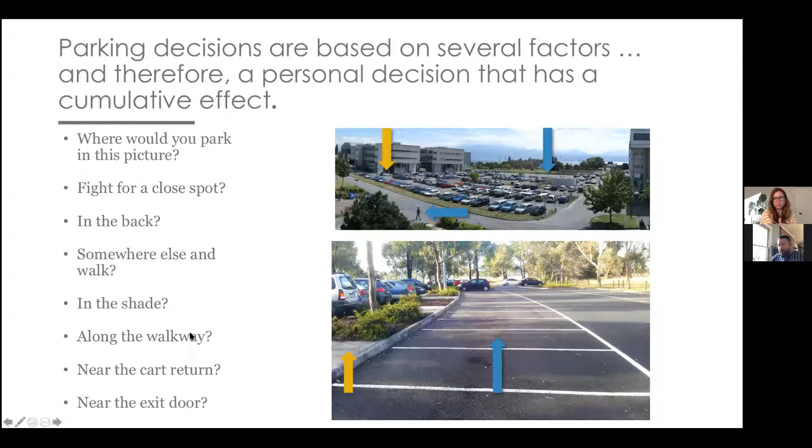And they all want the exact space they want. So they come to parking regulations thinking about where they want to park, but we have to take a step back and look at it from a bigger picture, and talk about how parking is being served.

We talk a little here about the history of parking in this country. We started out in the late 20s, early 30s, when very few people owned a car, but in the 30s we passed our first zoning ordinance. In the 50s, the Board of Adjustment had the authority to allow uses without parking, but eventually we took that ability away. In the 60s, the American Planning Association started recommending more and more parking, and I'll go into that process in a few minutes.

By the late 60s, about 83% of Lexingtonians owned a car, and we adopted parking standards that reflected everyone's willingness and desire, when land was cheap and available, for everyone to have abundant parking wherever they went. This was done nationally, so it's not like Lexington stands out as uniquely car-centric in any way.

Over time, because of the effect of all these parking spaces, we started amending the regulations again and again. We started in the 70s making changes, all the way up to as recently as 2020, trying to protect residents from the negative effects of automobiles. But what we were really regulating was giving relief to parking numbers, the number of spaces. That's primarily what all these changes relate to: how many parking spaces do we require, how do we provide regulatory relief so people can park the cars they need, and how do we still encourage and allow development to work within that framework.

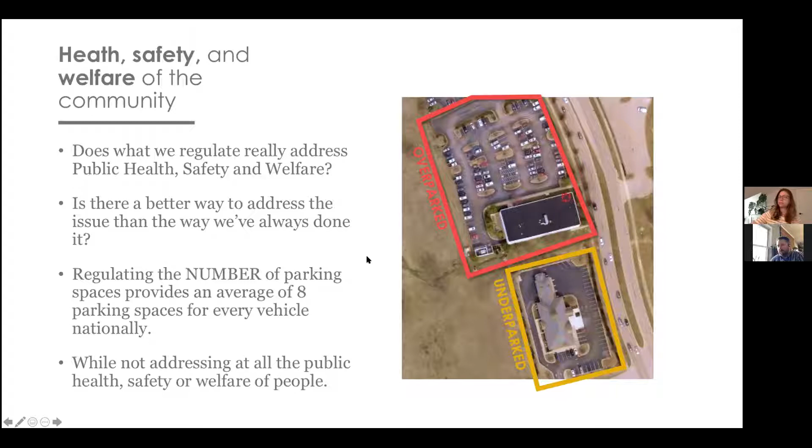But we've not at all addressed the way public health and safety is being served for people who use the vehicle, much less the people who don't.

So here I want to talk about the cycle of creating sprawl and how we set these parking standards. The Institute of Transportation Engineers, the ITE, they survey peak parking demand at suburban sites that have lots of free parking, and they report that parking inventory, using it to set a precise parking generation rate. Planners over the decades, and this manual is updated about every 7-8 years, set their minimum standards based off of these averages found in the manual, which provides ample free parking.

When the next ITE manual goes out and updates, they inventory again, and we've overbuilt the parking initially. They continue to update that, and it reflects more parking. We repeat this process over and over until planners, elected officials, and appointed officials start limiting development density to ease the congestion.

What that does is, because we've put so much parking around these sites that's not used, we spread the uses further out. People have to travel further to get to one of those uses. It's not accessible to them, it's not walkable to them. By spreading them out and making everyone take a car, we increase the demand there again for parking.

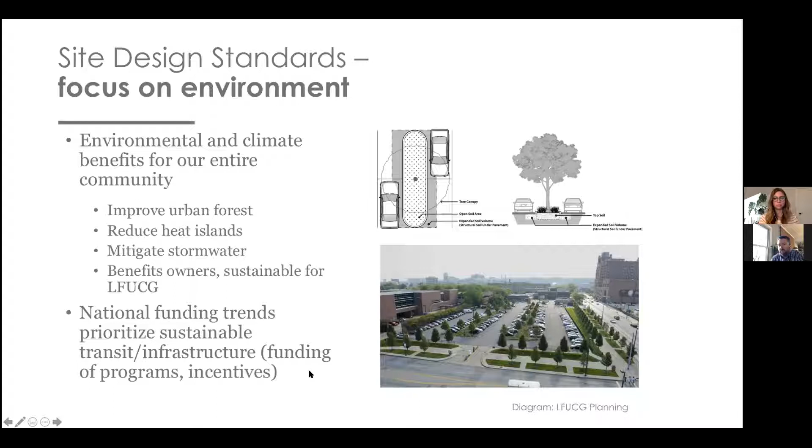And we want to make sure that our ordinance is on the cutting edge of that and ready to receive funding for grants and projects like that. If our ordinance is more forward thinking, we think it positions us well for those sorts of funding projects.

So again, we typically have a couple of types of parking in Lexington. We have our typical low density residential parking. We have our medium scale commercial that's sort of neighborhood oriented, and then we typically have our big box standard, our big giant parking lots.

And we've broken them down into 4 types of parking lots, and this is where I started cutting a little bit of content out, so I don't want to get too much into the weeds here. This is a little more in detail on our website.

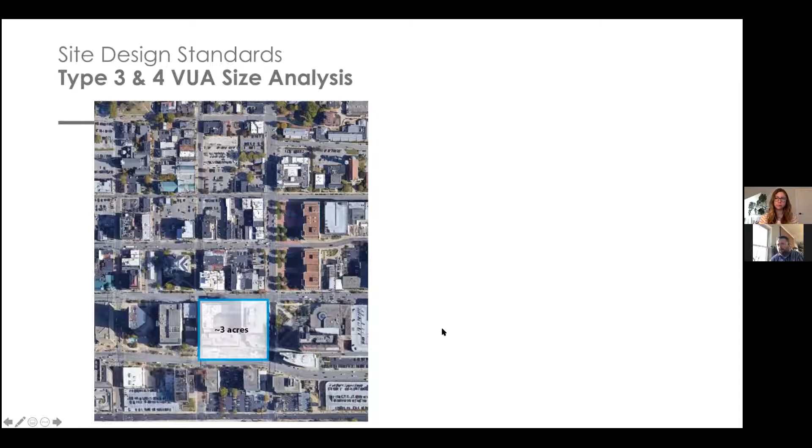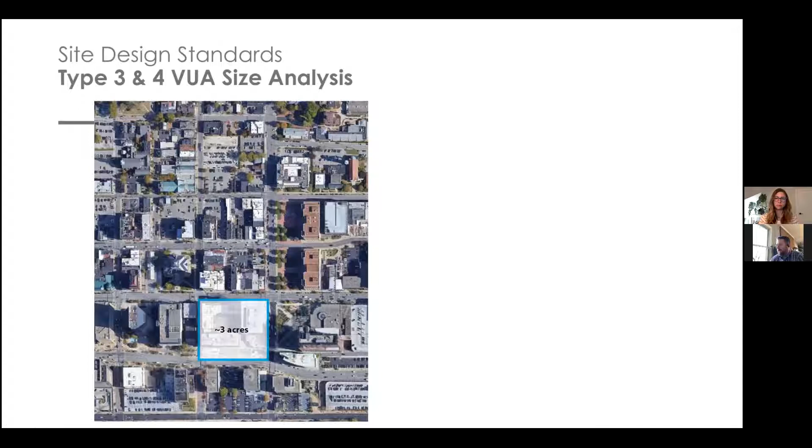But I'm going to talk primarily about the type 3 and type 4 parking lots that are really aimed at anything that's around 3 acres or less, or above 3 acres. And really the way we arrive at that number is that that's about the size of a city block. So we want to make sure that the parking lot is walkable the same way that a city block is walkable.

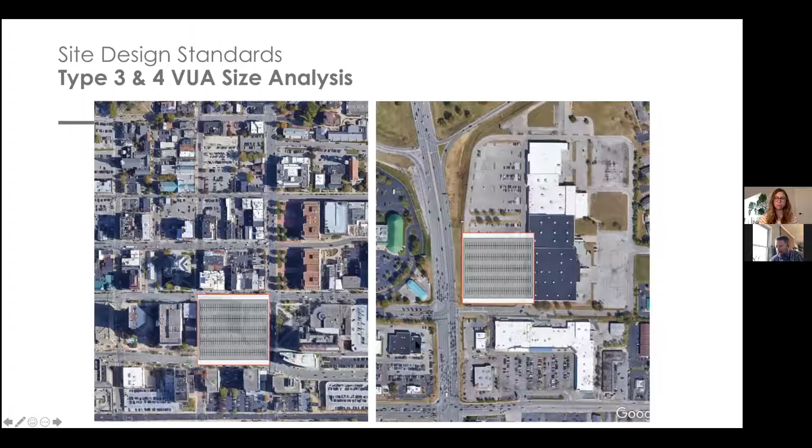And so if you look at South Park, you see that standard city block in front of, say, the Best Buy area, the Staples. There's basically 2 entire city blocks of parking at South Park. And you can see from the pictures just how much of that parking is utilized, but you also see that parking is largely just wide open.

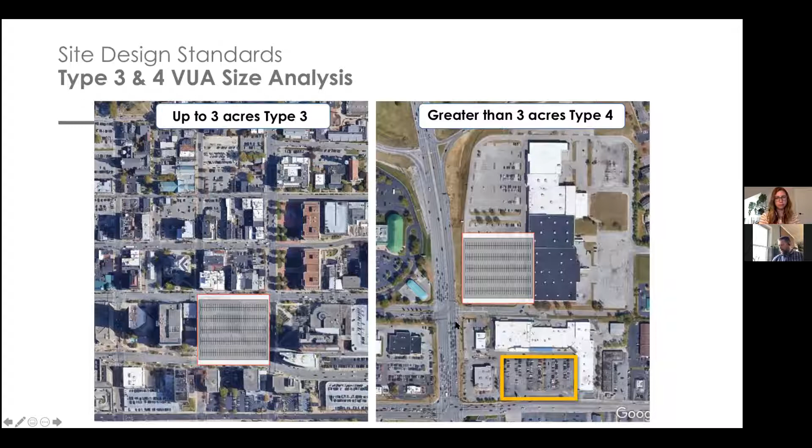We have parking lots up to 3 acres in our type 3, and then anything greater than 3 acres is a type 4 parking lot under our proposed design standards. So what you see over here at Crossroads would be a type 3. It's smaller than the city block, and it would have different standards.

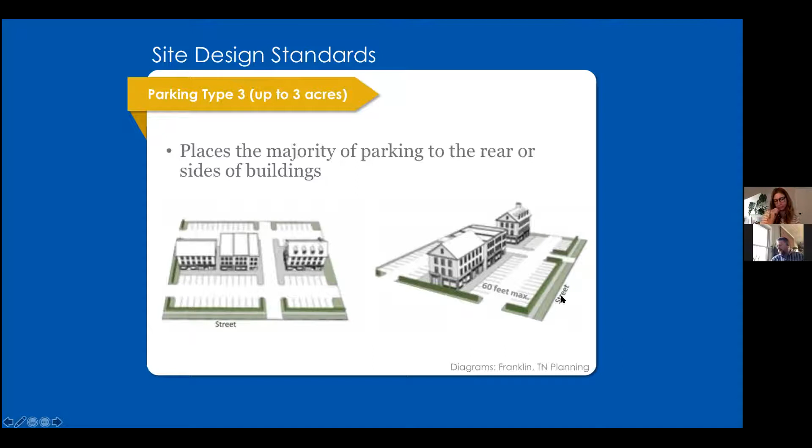And so the type 3 lots place the majority of the parking to the rear or to the sides of buildings. It starts limiting the amount of parking that you see between the street and the buildings. It's basically a drive aisle with parking on each side, 60 feet max.

Again, it features buildings and open space at intersections instead of parking. It's about bringing buildings to our corners and holding those corners with buildings for increased interaction. It improves our internal circulation.

We're going to set some perimeter connection standards to make sure there are places for pedestrians and transit users to get into the properties and access these parking areas and buildings. It also sets standards on the maximum street frontage and things like that.

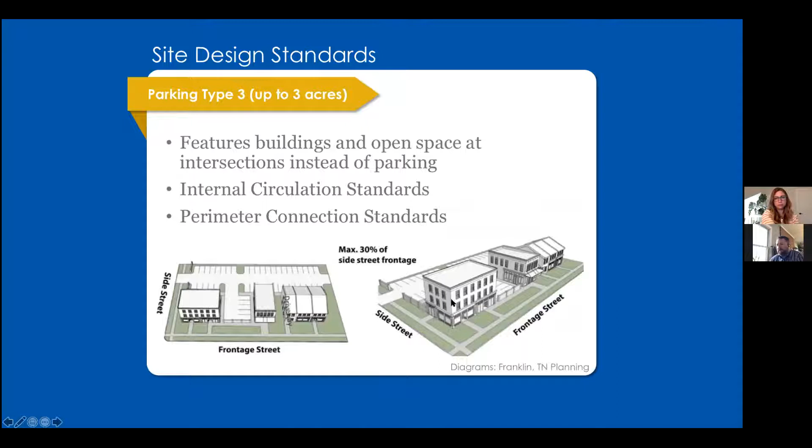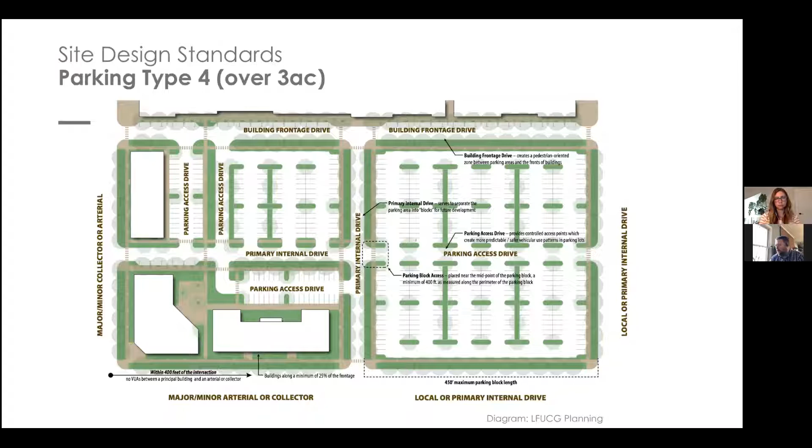We're not expecting every development to orient its front doors to the street, since most customers will be coming from the car. But we do expect engagement and activation of our public streets and corners with structures, and that parking will trend more toward the interior and sides of structures.

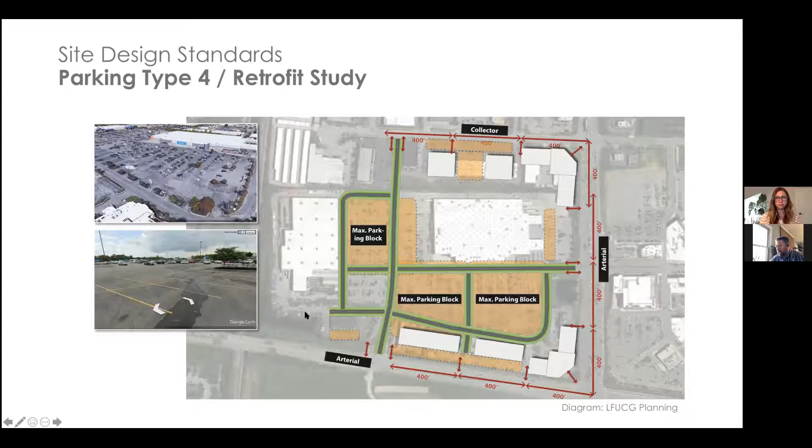This is one of our busiest transit stops in Lexington, out here at the Walmart across from the Lowe's, with a transit hub in that little island in the middle. So a minimal amount of retrofit is what we're talking about for most big box standards, with huge gains in terms of pedestrian safety. And the loss of parking spaces would be minimal compared to the number of spaces actually used on these sites.

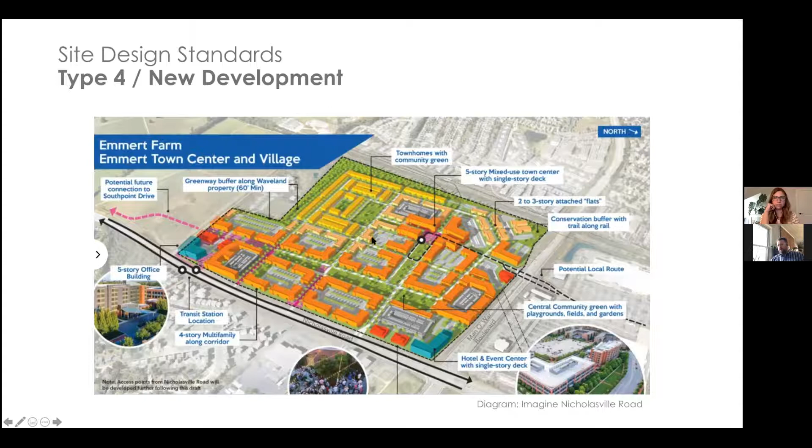We're trying to regulate what's most important to the community, enable the comprehensive plan, and increase public health, safety and welfare. We want flexible and focused regulations that serve everyone.

These changes set a new standard for parking, but we can't stress enough that the actual effects will be a very gradual change over time. No one will be rushing out to get rid of all their parking. We hear regularly from people who call and say they need more parking, asking where they can get more. So we don't expect these changes to be radical.

We want these regulations to be designed, as Brittany said at the beginning, for people instead of vehicles. We want to make sure we're balancing everyone's needs, enhancing the city, and creating opportunities for all sorts of people.

Some of the things we're working on: we have a community parking survey on our website, which I'll show in a second. We're setting up focus groups with the business community and others interested in the parking text amendment, and sending out surveys. We've already started with online video presentations on our website and social media outreach.

Civic group presentations like this are critical to us. It gets us in front of lots of people, and some of you here today may have neighborhoods or other interest groups you'd like us to talk to. It's about getting the word out and offering our services to talk about what this means for you and for the community.

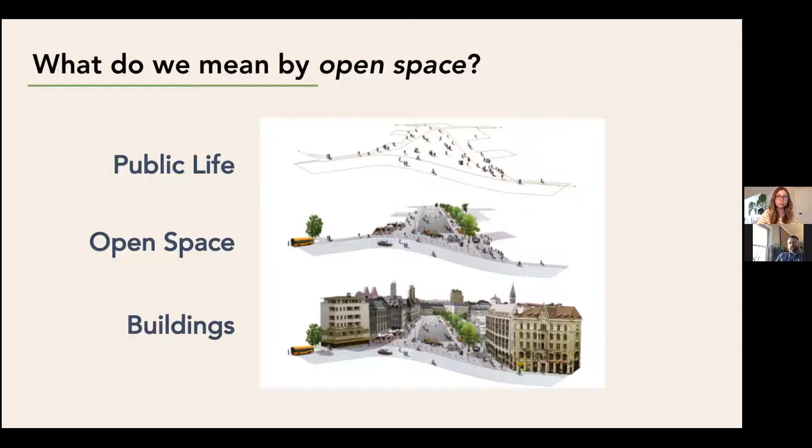So with this particular text amendment, we're talking about neighborhood scale open spaces. We know that open space in neighborhoods is a critical element of the social infrastructure. It's where people live their social lives in neighborhoods. It could be at the scale of a small corner plaza or a pocket park or a vegetable patch in an apartment courtyard garden.

These are the types of open spaces where neighbors gather, and without them, our neighborhoods wouldn't be complete. So what we're recognizing with this ZOTA is that just the same way we have regulations for the size and the height and the placement of buildings, we also need to have regulations that ensure that during new development, we get open spaces that serve the neighborhood.

So we're focusing on neighborhood open spaces like the ones pictured here that would be provided by developers as part of new development.

And all of this is grounded in our comprehensive plan goals and objectives, and council unanimously approved these goals and objectives. In theme A, which is about neighborhoods, we have an objective that says incorporate adequate green space and open space into all development projects which serve the needs of the intended population. So this is a really clear objective. It's not ambiguous. We have a directive from council here.

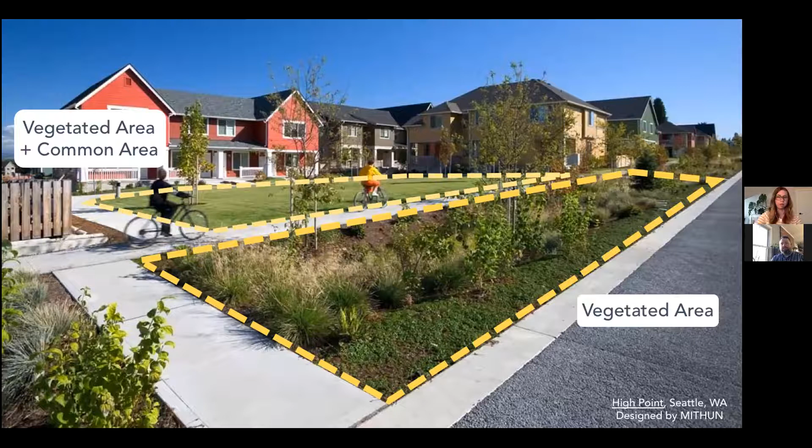So what are we planning to regulate? In the multi-dwelling uses, we're not going to ask for more than what's already required. Most likely we'll ask for slightly less combined open space in exchange for better quality common areas. In the single family or single dwelling context, we'd be adding a new requirement because we don't currently have a minimum usable open space requirement there, so we will be asking for something.

What we're planning to regulate in terms of vegetated area would be pretty limited, just has to be green growing stuff. But we do want to add incentives to try to get more ecologically productive landscapes, and incentives to help with preserving and restoring our environmentally sensitive areas.

For the common areas, these are places intentionally planned for use by people. We'll be introducing standards that make sure these are accessible, of a size and dimension that's usable, that they're visible - I can see into the space and it feels safe - and that adjacent uses activate instead of detract from the open space. Minor physical improvements include benches, walkways, some requirements for plantings and trees, pedestrian scale lighting.

A maximum slope, so this can't just be the honeysuckle slope behind the building, and also providing standards when green infrastructure is used to make sure that's actually an amenity for the people using the common area. This is an example of the type of vegetated and common open areas these standards would be aimed at getting more of.